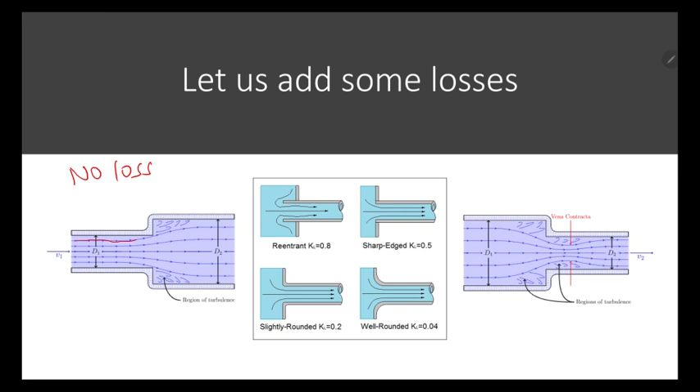My dear people, so far we have only considered that there is no loss whatsoever in terms of the flow that is happening. Yeah, but in reality there is always some loss that's happening. There is loss. Look at the flow over here. The flow is happening over here, but then what is happening in this area? Do you see? There is a region of turbulence, which means that the flow is losing some energy. The energy is not getting conserved, is it not?

Is it? And also look at this pipe over here. When the pipe is inserted like this, the flow is not very steady, which means that there is going to be some loss, and the loss is represented by the letter K.

I have no idea why. If I were the one who was making it, I would just represent loss by the letter L. But I have no idea who decided loss is always represented by the letter K.

Yeah. And look at this. There is some loss here. There is loss here. There is always loss. And also, this is when the flow is going from a region of smaller diameter to a larger diameter. But look at this, when the flow is going from a larger diameter to a smaller diameter, again, there is some turbulence that's being created.

Yeah. Now, let me ask you something. If the pipe is going like this, imagine the flow will just first hit, and then there will be a sort of turbulence created, and then the water will start flowing up. So there is again some loss of energy over here. Do you see? So there is always some loss happening in the flow of liquids.

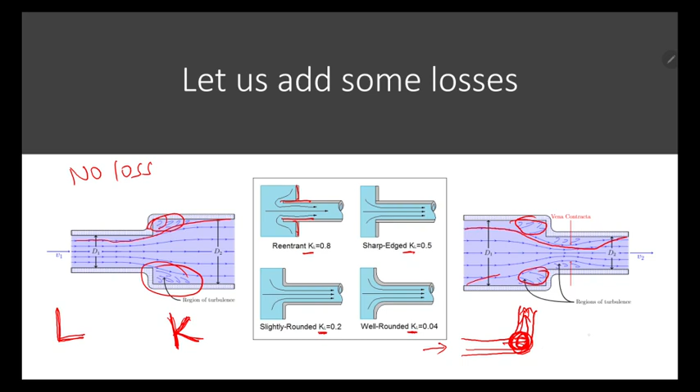Yeah. So if Bernoulli's equation does not take into consideration all these losses, can it be practically applied? Can it be practically useful? Yes, my dear people, yes. If we can understand the losses that are happening, and if we can add it to our equation, then everything becomes simple. Let me show you what I mean. Look at this.

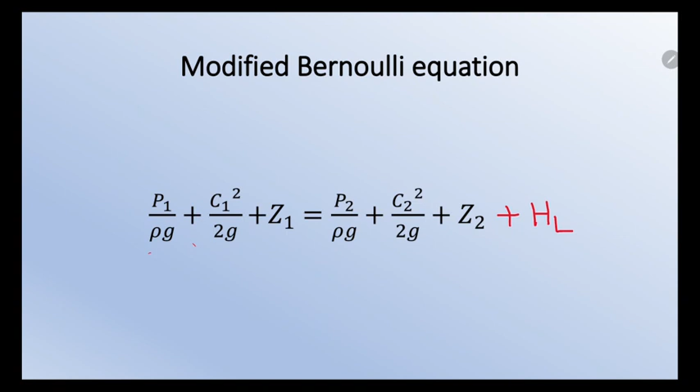All that I have done is, this is the Bernoulli's equation, and this is the head loss, the total head loss, all the losses that are happening because of the contraction in the pipe, because of the enlargement in the pipe, because of the pipe going at different angles. Imagine if a pipe is like this, it is first going to hit over here, create a turbulence, go up, create a turbulence over here, and then go. So it is going to create some loss of energy.

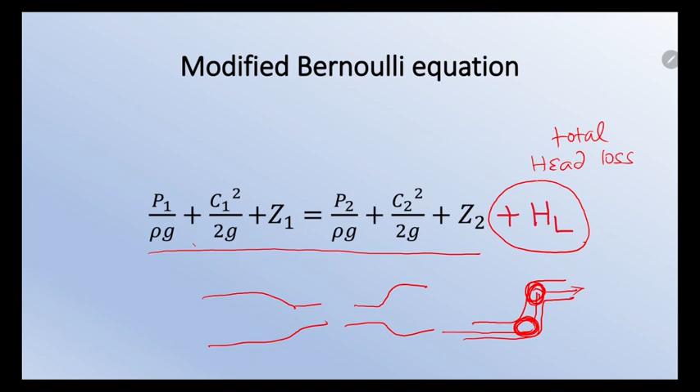So all that I'm doing is I'm just adding this particular head loss value. Usually in this first year, for you the total head loss will be given in your problem. So all that you have to do is, whenever you have the head loss, you have to add it to the equation. Is that okay, my dear people?

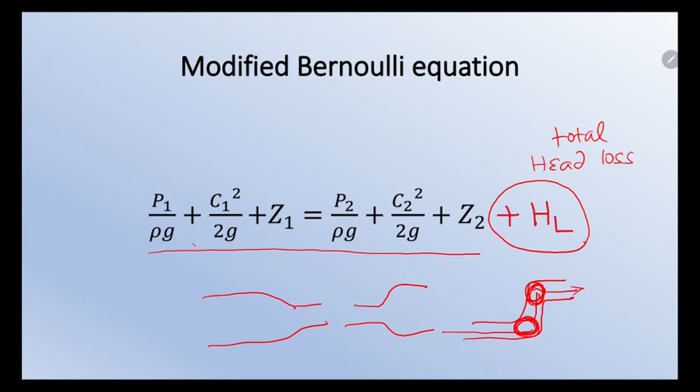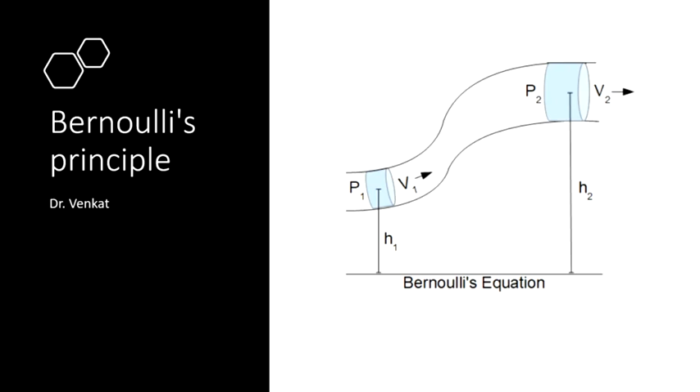This is Z1. Okay, and section 2 is at an elevation of 107 meters. So it means that water, when it's going to flow, has got to flow up. And the diameter of pipe at section 2 is 30 centimeters. So the diameter is doubling. Do you see, here it's 15, here it is 30. So the diameter is bigger here.

So a discharge of 50 liters per second, so we are given the discharge, 50 liters per second, so we have to convert it into meter cube per second, is passed through this pipeline. The pressure at section 1 is observed to be 30 kilopascals, so we have to convert it into pascals. And the total energy loss is 2 meter. Why do you think there is an energy loss that's happening, my dear people? Why do you think?

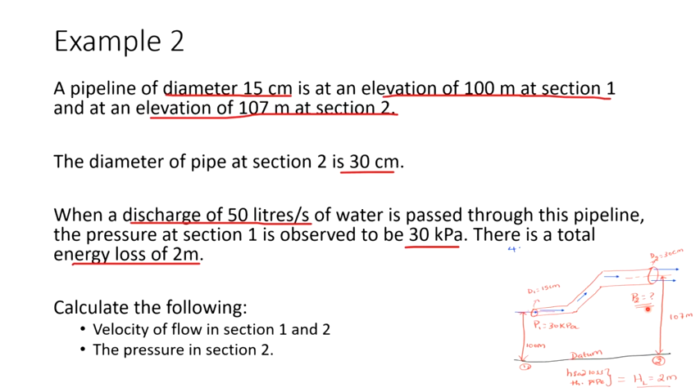So again, all that I'm doing is I'm just highlighting all the information that we are given, so I do not lose anything. Okay, now let's go. I've just redrawn the diagram here so that we do not lose any information. So look at this. The head loss, I've written it as capital H L, head loss, 2 meter. Okay, now to find C1, C2 and P2.

So from the continuity equation, we know the volumetric flow rate 1, the volumetric flow rate that's happening here, equals the volumetric flow rate happening over here, which is 50 liters per second. So how to convert liters per second into meters cubed per second? All that we have to do is divide by 1000. So 50 divided by 1000 is the volumetric flow rate, 0.05 meters cubed per second. Well, there is also a head loss, so be quite careful about this.

Now all that I'm going to do, my dear people, is use the volumetric flow rate. V dot equals C times A. So C equals volumetric flow rate divided by area 1. We know the volumetric flow rate is 0.05 meters cubed per second divided by the area. Here we are given the diameter 15 centimeter, so it is a circular cross section. Area of a circle is pi r squared or pi d squared by 4. That is what I've used here: pi by 4 times d squared. D squared is 0.15 squared.

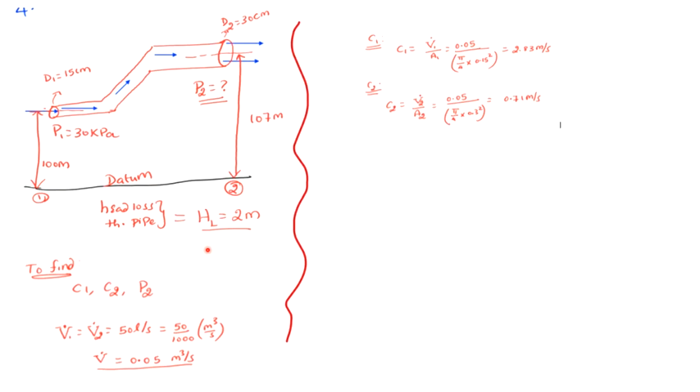So C2 equals, I've just used the same thing, V dot 2 by A2. Volumetric flow rate is the same, 0.05 divided by pi by 4 into 0.3 squared. 0.3 is because of the diameter 30 centimeter being made into meters. So I get this particular value. So now to find P2, I'm going to be using Bernoulli's equation.

So P1 by rho g plus, which is the pressure head, the kinetic head, and the datum head, is equal to the pressure head, kinetic head, and the datum head on the other side. But we know that there is loss, so I've added it over here, plus the head loss. Do you see, people? This is Bernoulli's equation. Usually we assume that there are no losses, but since we are given that there is loss, I've just added it over here.

And we know P1, we know density of water, we know what is C1, we just found it, we know gravity, we know Z1, 100 meter. Similarly, we know rho, C2, and Z2, and also HL. The only unknown is P2. All that we have to do is just substitute everything that we know in the equation. It is as simple as this. And then if we rearrange the equation, I get the pressure to be minus 54.37 kilopascal.